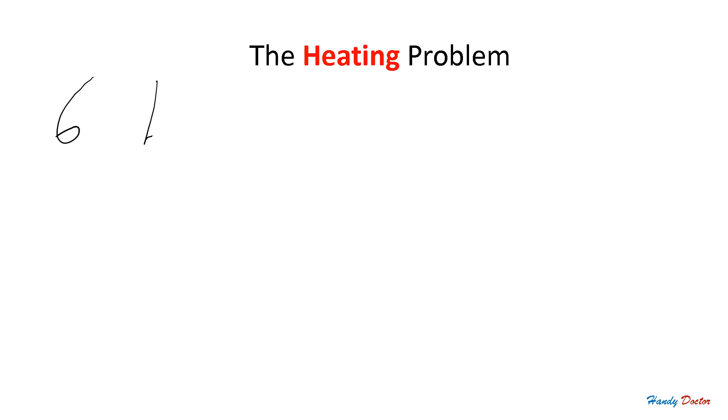So it's about heating, and obviously right now we don't need a heater, but in wintertime we do need one. It gets pretty cold out here. But what's the problem? Okay, first of all, I bought this house used. It was only a 6 year old house back then. So very new, and the heater should be just 6 years old, not a very old one.

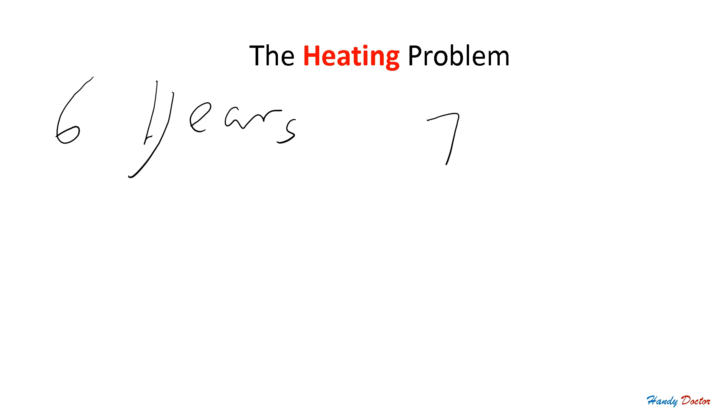But sometimes the heater would quit. For example, I set the thermostat to like 72 degrees Fahrenheit, and it would quit at like 68 or even 65. When I got back home, it was so cold inside the house. Sometimes it happens, sometimes it doesn't. So what's going on with it? I have to fix it somehow.

I have to tell you that this is my first house. I did not know a whole lot about furnaces, but I do keep in mind it burns natural gas, and that by itself could be a little bit dangerous. I consider myself pretty handy, but because it's pretty new to me, I was trying to be very careful with it. I may have to hire somebody to fix it.

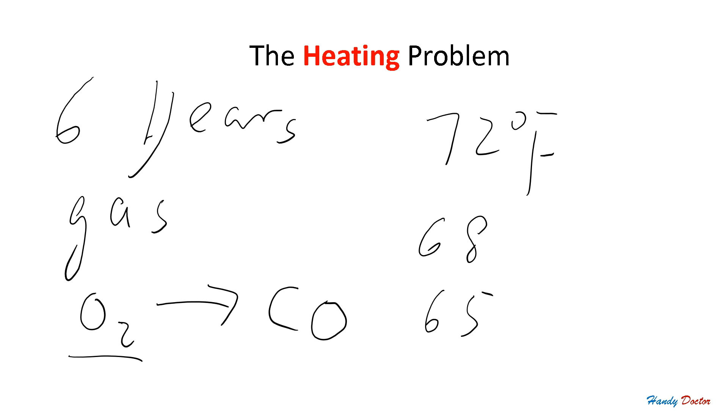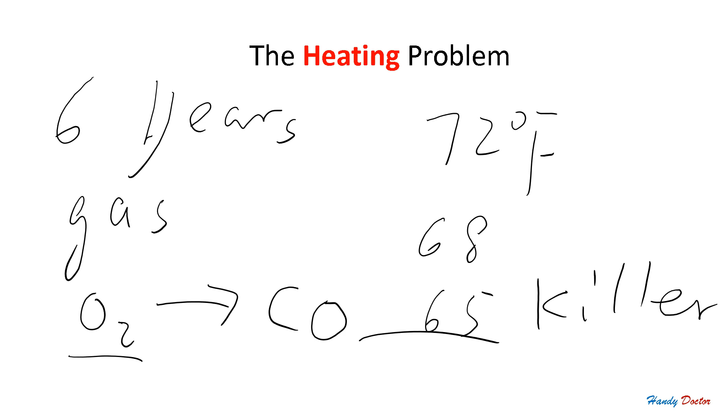Two issues here, right? Gas itself is dangerous. We all know that. And the furnace burns gas with oxygen, and that could generate carbon monoxide if we do not have enough oxygen. And this is a killer. I definitely do not want to put my family in danger. So I always keep that in mind. Anyhow, I decided to get started.

Luckily, my previous owner kept me the manual, just put it in one of the drawers. So I found the manual. And I looked at 6 flashes. What does that mean? It tells you that the pressure switch opened 4 times during the call for heat. Okay, I get it. So something about the pressure switch.

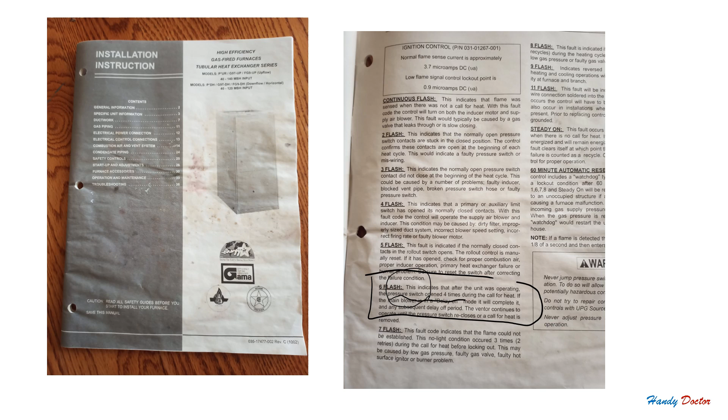I totally had no idea what that thing was at that moment. But we have Google, so I just Googled a little bit, and that's what I learned here. The pressure switch: why do we have it, and why is it so important? Well, it's actually pretty simple. Remember, it is a gas furnace. We burn gas with oxygen, and oxygen is inside air.

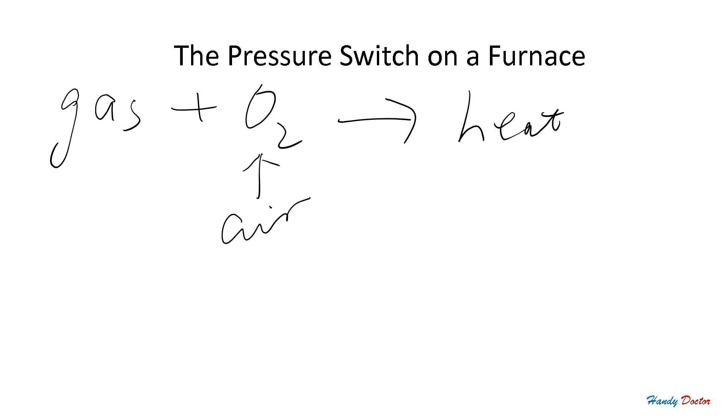The air provides the oxygen, and that will give you heat. Of course, you also generate water and carbon dioxide, hopefully. We have a blower, and the blower will suck the air and provide it to the burner, and the burner will use the oxygen. Simple as that. Now, how do you know the blower is working properly? This is the job of the pressure switch.

If the blower works well enough, it will generate a high enough pressure. In that case, the furnace knows we should have enough oxygen to burn the gas. So we will generate water and carbon dioxide, not carbon monoxide, big no-no. So in other words, the pressure switch is a safety device.

It makes sure that the furnace has enough oxygen to burn, and we do not generate carbon monoxide to kill anybody. Sounds pretty simple. So what does that mean then? Should I just replace the pressure switch? Well, not so quick. When I looked over the internet, basically everybody said this pressure switch never goes bad. This should be the last thing you should suspect.

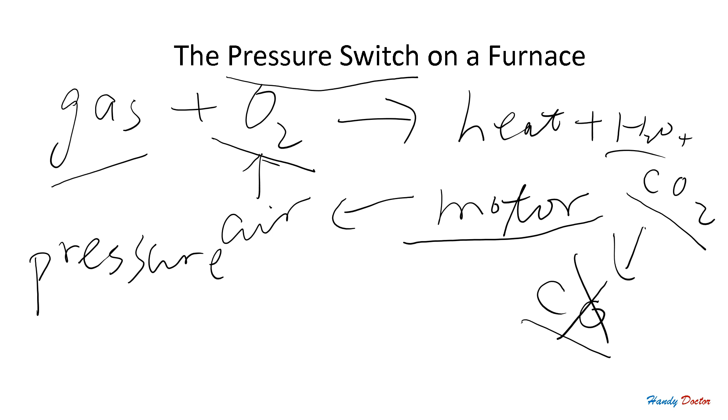Wow, never goes bad. The last one you should suspect. Got to be kidding me, isn't it? So what does that mean? It means that if there is an indication there's a problem with the pressure switch, usually it is something else. Well, that wasn't very helpful, was it? It never fails. Seriously? Well, I decided to study a little bit more about the pressure switch, so I know what the reading should mean.

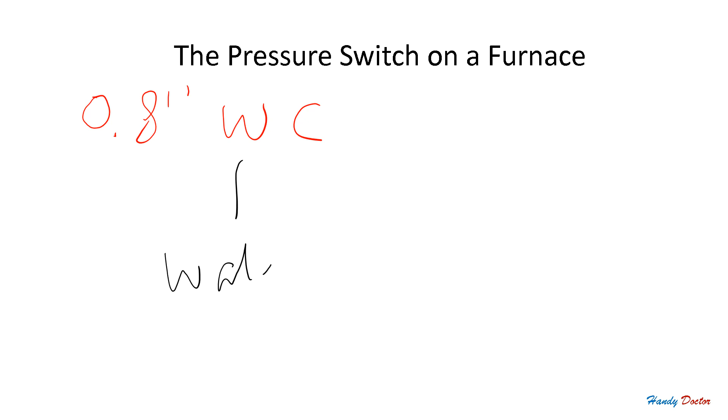Usually on a pressure switch, you will see a number, for example, something like this: 0.8 inch WC. You may say, what does that mean? The W here means water, and C is column. In other words, it measures a pressure, and the pressure in this case is 0.8 inch water column. You do not really need to worry about what that means. If you still remember, that's good. If you do not remember what you learned from high school, that's okay. So that is the reading we are looking for.

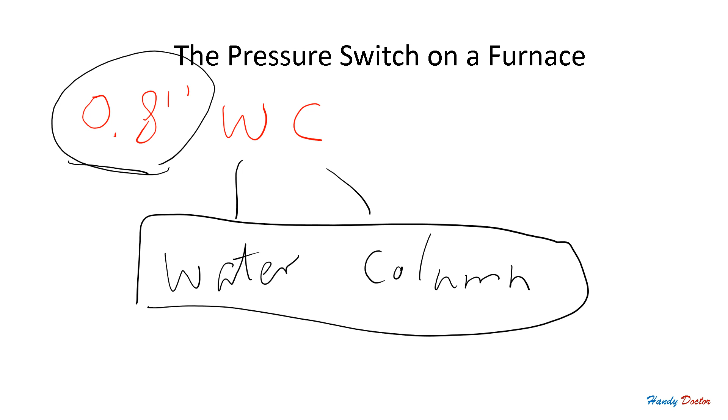The bigger the number, the bigger the pressure difference, meaning the bigger the motor is, and that means it can provide more oxygen. So that is the basic idea. Well, even though it said it never fails, that was my problem, and everything else seemed to be working. So I decided to look into that. It's very simple.

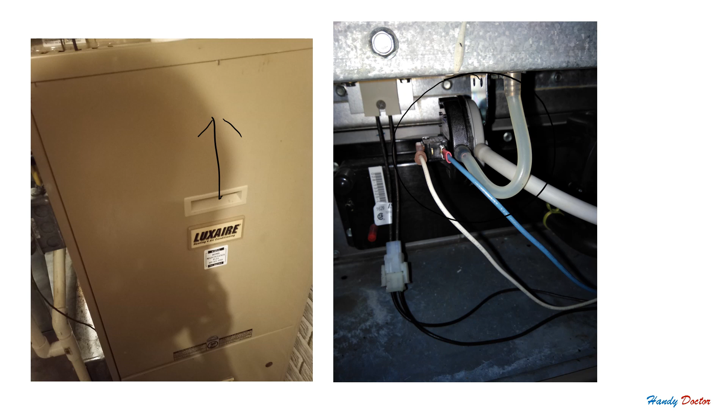Again, we just take this cover, pull it up and lift it up, and here is the pressure switch. As a matter of fact, this is the correct one, the one that I put on later on, and I took the picture today. So that was not the incorrect one, but they should look the same. That is the pressure switch. Back then, I decided to take it out and have a look. But before I did that, I had the manual, didn't I? So I decided to look at which pressure switch it should be.

The manual includes many models, and this is my model, and here is the pressure switch, and here is the model number, and you see I have a 5-burner. A 6-burner one will have a different one. You see that one of the digits is different, and I would suspect that it's one with a higher reading. So I know which pressure switch I should use. Now let's look at the one on mine.

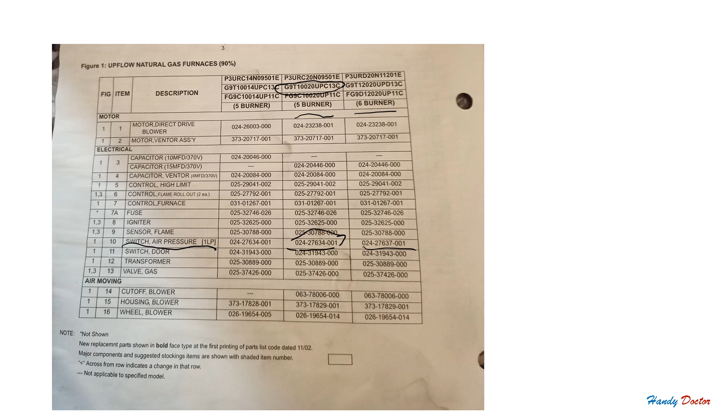This is when I took it out. The label, the model number, is not in the same format. So if you remember, this was the one, not in the same format. It also has a different model number, looks like it. But it's still not the same one, right? Well, good thing we have Google, so I decided to Google this long number. And guess what I found out?

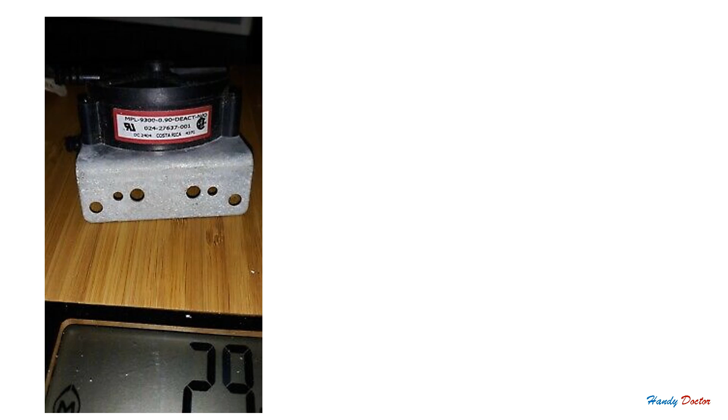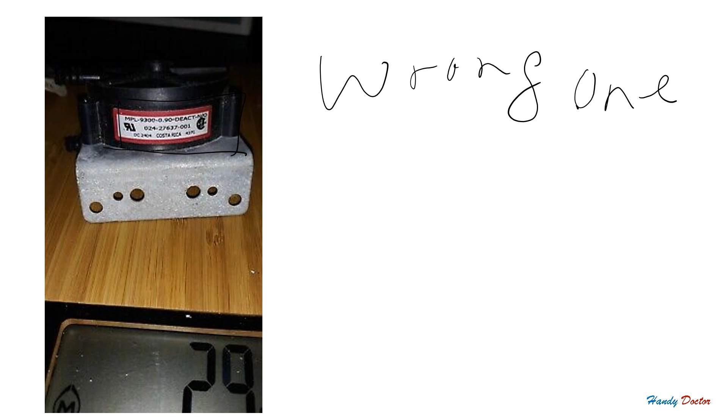Now remember, the correct model here, you see that it's 27634. And the incorrect one here is 27637. Honestly, this is a picture I got today. But back then, I Googled all over the internet, I found many pictures and many descriptions. And you know what? For these ones, it has both model numbers, and this is the one for the 6-burner. Wrong one. Very crazy. And I swear, I really searched all over the internet to make sure that it really indeed was a mismatch.

After I was very convinced that it was a mismatch, what do you think my reaction was? I cursed. I definitely cursed. Cursed really badly. Because this is a super important part, and it was not the right one. I was convinced because all the information over the internet is consistent, not only the internet forums but parts stores and pictures, everywhere they are consistent that this is a part for the 6-burner, a bigger model, and I have a 5-burner.

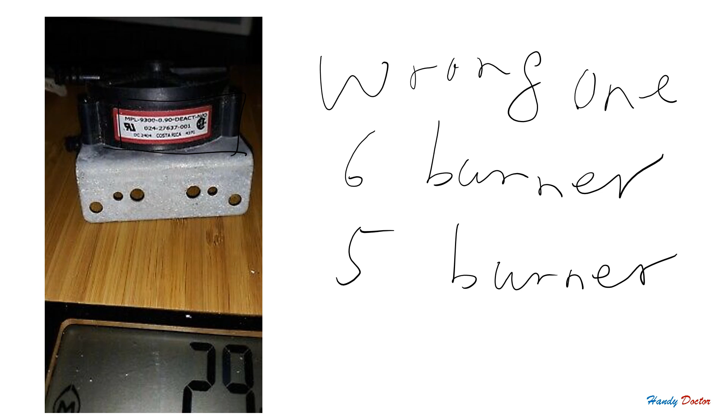This was crazy. Now remember, this furnace was only 6 years old, because my house was only 6 years old. And this is a part that should never go bad. So who put this incorrect part into the furnace? I decline to accept the idea that the manufacturer put it on. That would be too crazy. But if the manufacturer put the correct one on, how come it went bad? Remember, it should never fail. So it's still a mystery.

But I was quite convinced that that was an incorrect one. Well, should I go ahead to replace it? I struggle, I tell you the truth. I struggle a lot. Because of what? Because even though all the information told me it was not the right one, I need to get a smaller one, as a matter of fact. But should I really get a smaller one? Well, let's see what kind of consequence I may have.

Okay, if I have a pressure switch with a smaller reading of water column, then even when my motor does not produce enough air, and that means enough oxygen for the gas to burn, okay? So this is not enough. Even if that was the case, the furnace would still run and provide heat. Oh yes, and provide carbon monoxide. That would be super awfully dangerous.

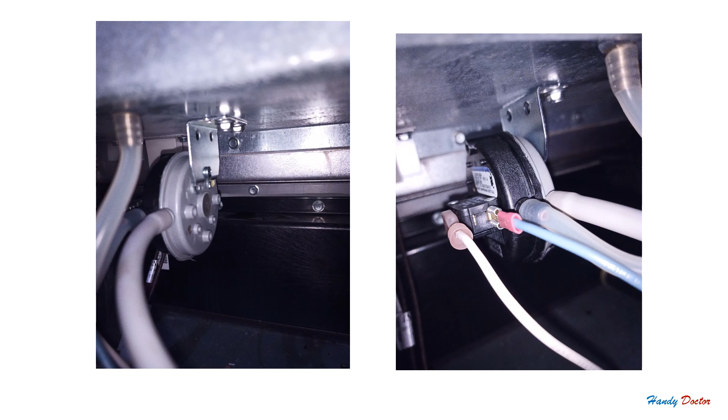Okay, so the replacement procedure is very easy. You see, these are the 2 screws that hold the pressure switch on the furnace. Just take them out. And then there are several connectors. So 2 connectors connected by air, and you see the 2 tubes are different. You cannot make a mistake. You just plug it in, this one and that one, the same color anyway. And then you have 2 electrical connectors. The connectors themselves are different also. There's no way you make a mistake. Just put it in and you're done.

There are several things we learned here, though, I guess. Okay, I don't know. I tend to trust a professional because I myself am a professional in some other disciplines. But on the other hand, is that really what we should do sometimes? I would say be very careful, like I did. I was happy that I was super careful. I did not draw a conclusion really quickly. I did all the research, found all the resources available, and double checked, triple checked, because this is a super important part for safety, right? And have backup, etc. So be very careful.